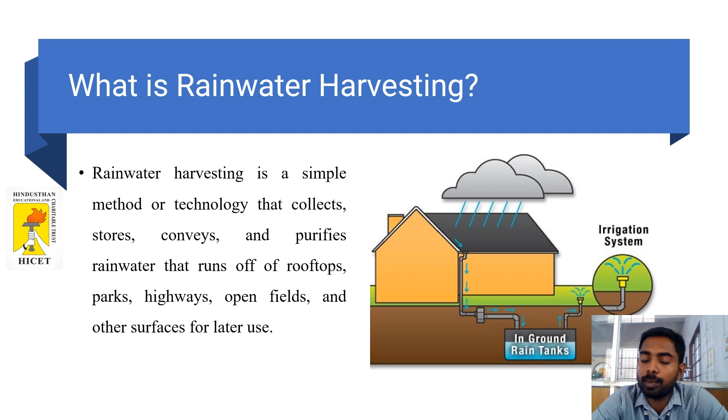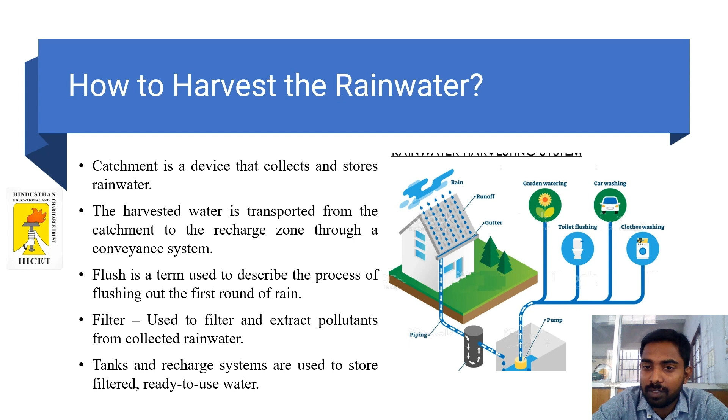From that piping it has been connected with the filter. The filter removes the impurities and transfers the rainwater to the storage tanks. From that storage tank, we can pump the rainwater for various purposes like garden watering, toilet flushing, car washing, and clothes washing.

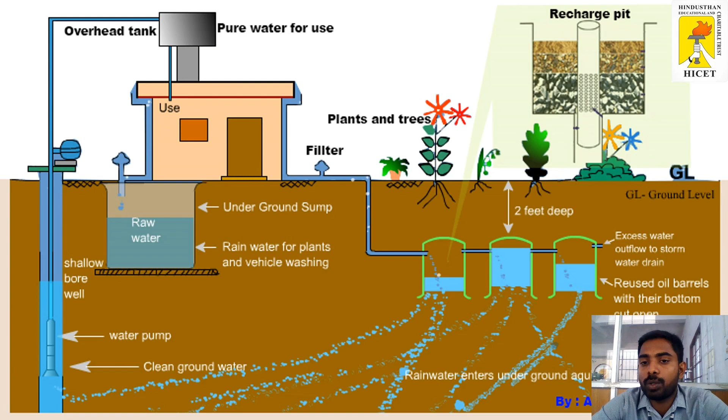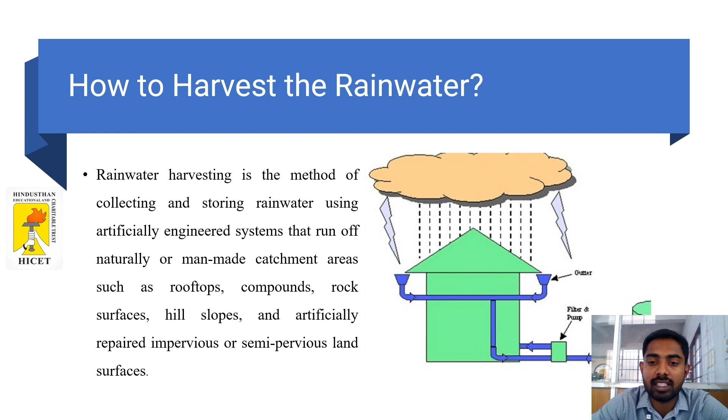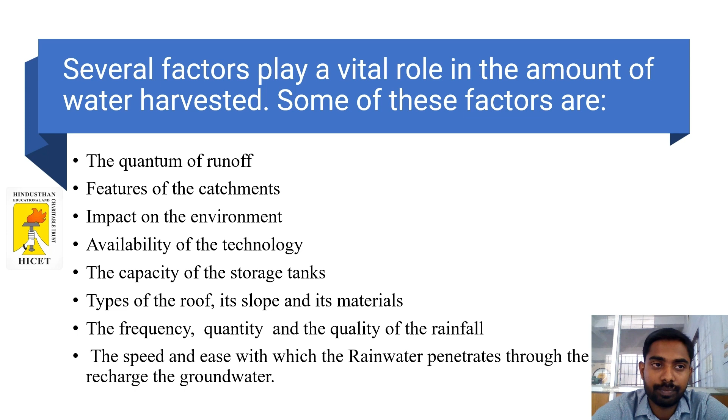Cherrapunji in India has the highest rainfall in India. Also important is the speed and ease with which the rainwater penetrates through the subsoil to recharge the groundwater, how this water has been penetrated into the subsoil and recharges the deep well foundations or some water tables.

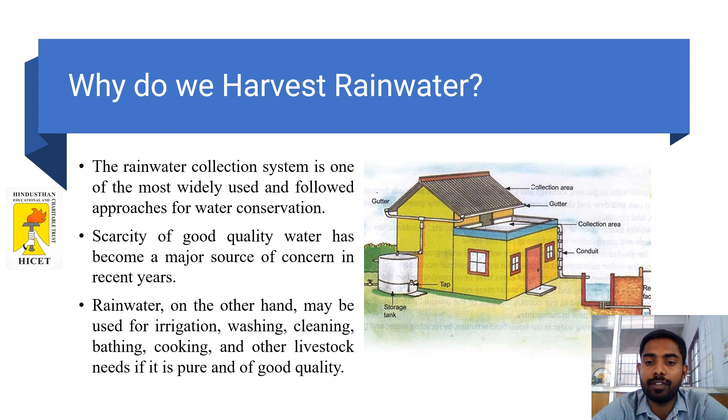The various advantages of rainwater harvesting include less cost, helps in reducing the water bill, and decreases the demand for water, and reduces the need for imported water, and promotes both water and energy conservation, and improves the quality and quantity of the groundwater, does not require a filtration system for landscape irrigation.

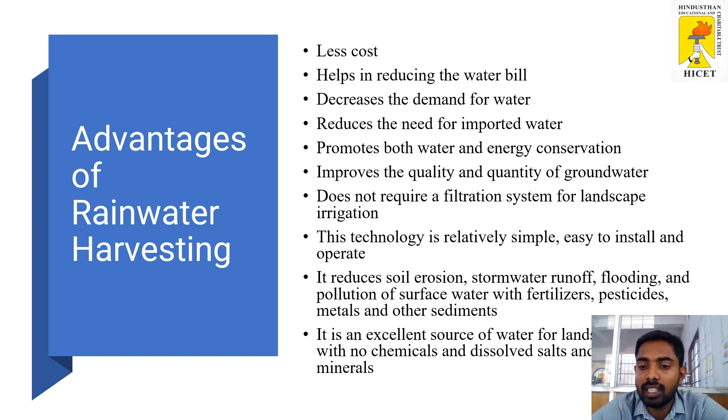This technology is relatively simple, easy to install and operate, and it reduces soil erosion, stormwater runoff, flooding, pollution of the surface water with fertilizers, pesticides, metals, and other sediments. And it is an excellent source of water for landscape irrigation with no chemicals and dissolved salts, and minerals.

The disadvantages of rainwater harvesting include that regular maintenance is required and requires some technical skills for installation. Limited or no rainfall can limit the supply of rainwater. If not installed correctly, it may attract mosquitoes and other waterborne diseases. One of the significant drawbacks of the rainwater harvesting system is storage limits - some water has been stored and some has been discharged to other parts. So that storage limit is the disadvantage.

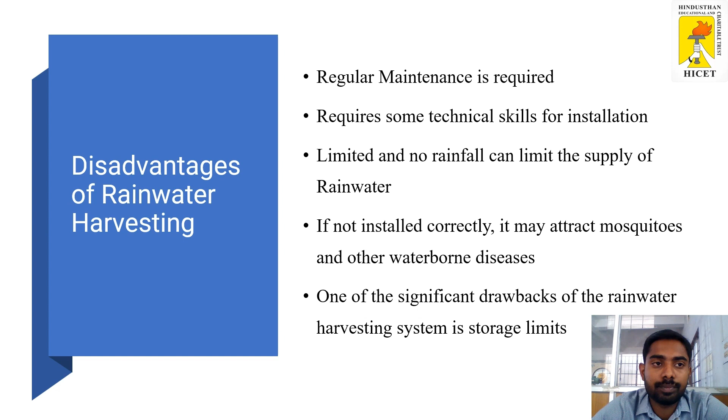I hope you understand about the rainwater harvesting. Thank you.